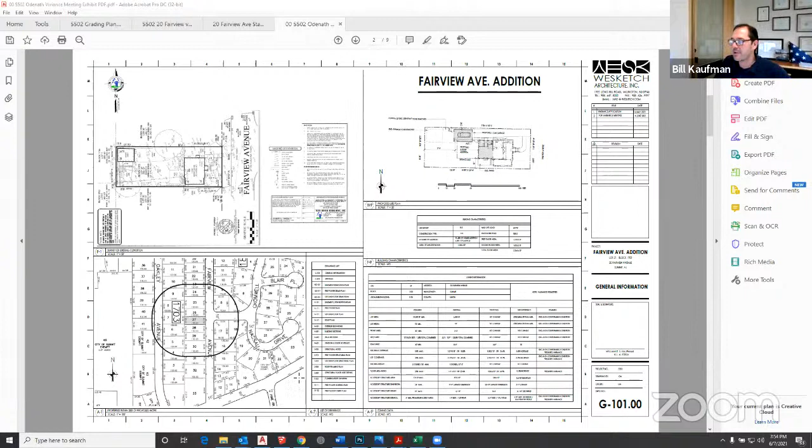But if we refer to drawing H9, which is the upper right-hand corner of G101, that's the site plan. I don't know if the board can see that, or do I need to zoom in on that? Would it be helpful if I zoomed in? I'm just going to be referencing it with the cursor. If you could zoom in, that'd be helpful. I'll take the bullet on that one. Even I'm squinting. I'm just going to zoom in. It's a little bit more difficult as we're going live here to toggle.

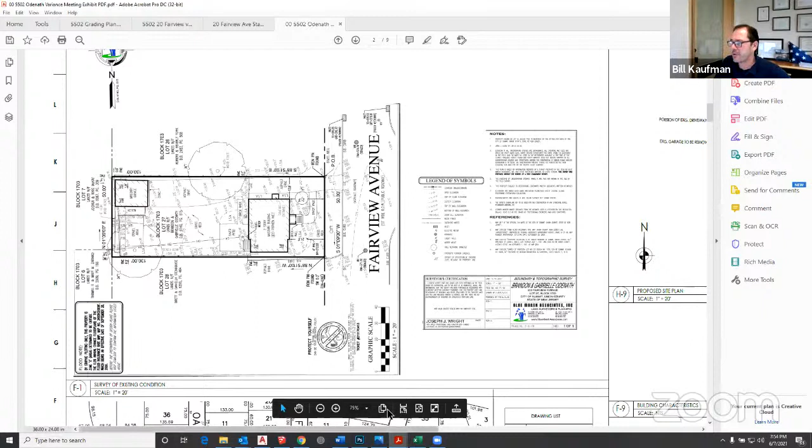I should point out that the information that we derived the site plan from, that's in front of the board, was taken from a current survey that we had prepared by Blue Marsh Associates. I'm going to have to squint and find the date on that for the record, but it is May 11th, 2021. So the survey is current. This is drawing F1 on my sheet G101, and this has the depiction of the lot.

The darker outline around the perimeter is the lot. The next line weight with the box in the front is the existing residence, a two-story brick building. The garage that was in question is in the northwest corner of the lot, to the rear. The home is flanked by an asphalt driveway that runs along the entire length of the northern line, pretty much right up against the property line, and then it pulls off about 1.5 feet as we get close to the garage.

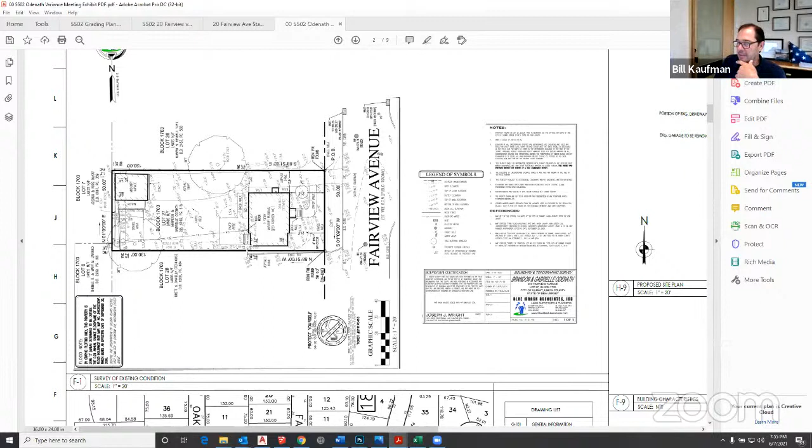And the patio that Mr. Odenath had referenced is directly behind the residence, on the southwest corner of the residence.

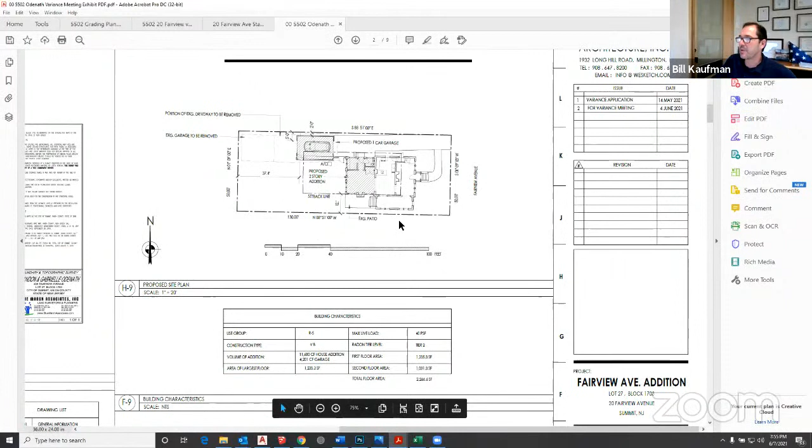We slide on over to H9, which is the proposed site plan. This gives a better indication of what the plan is. The lighter lines in the front are simply the surveyed house, but with the context of interior spaces. So you can see there's a living room and a side porch to the south, and in the back to the west is the kitchen and the small eating area.

The proposal is a two-story addition directly to the west of the building. You may be able to catch these dotted lines that represent the setback lines around the perimeter of the lot. The setback lines are indicated here, so you can see that the hashed marks for the addition fall within the building setback on the north and south property sides, as well as the western rear lot.

The former garage that we're proposing to move is represented by these hash lines in the upper left-hand corner of the property, the northwest corner. We're proposing to move that forward for a number of reasons, mostly practical, in terms of accessing the property from the garage and its functionality. Its distance from the two structures makes it a little awkward if it's all the way in the back, and also it creates a little more yard space.

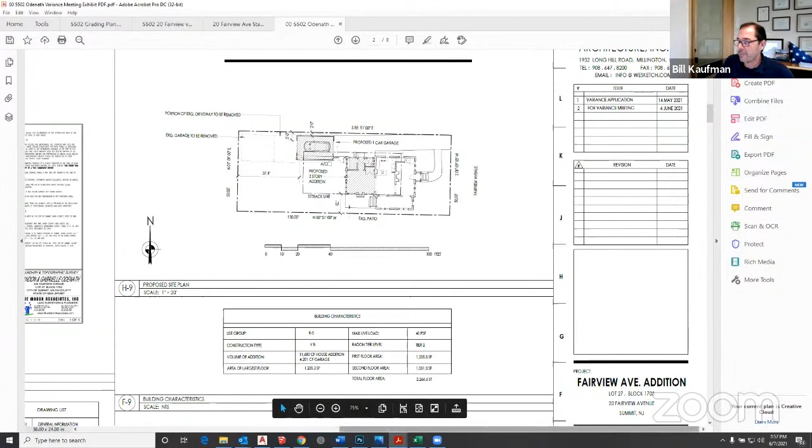The most notable thing that might be obvious is that this lot is substantially undersized from the DRO regulations. This is a 50 by 130 foot lot, and it's about 3,500 square feet smaller than the minimum that the ordinance provides. So while the house may be modest in its scale, it's on a lot that's substantially smaller than others in that R10 zone.

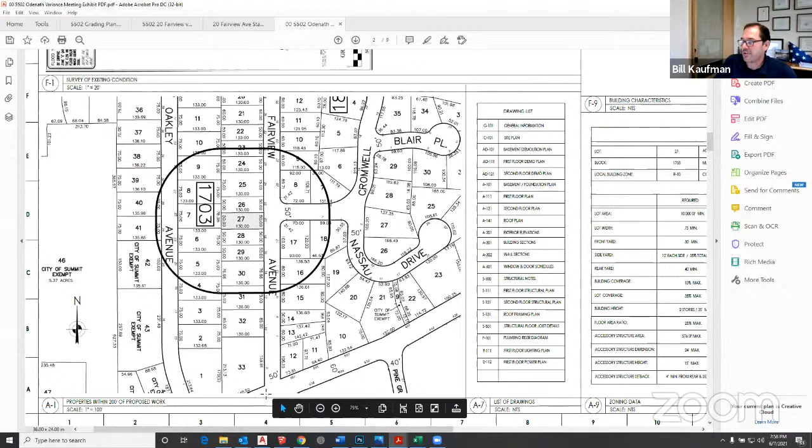I think I have another drawing I can refer the board to. There are a few lots around lot 27 - I'm referring to A1 of the same G101 exhibit. You can see there are a number of those, maybe 4 lots in a row, that were cut down to 50 by 130, whereas many of the other lots are much larger. Lot 25 to the north is of the standard scale. More along Oakley, the lots immediately to the rear are a little bigger, and immediately to the south on Fairview, there's a series of lots that are 85 by 130. So when they created the DRO, presumably it was just an average lot size in this area of what existed, but this particular subject property falls within one of those that are substantially smaller.

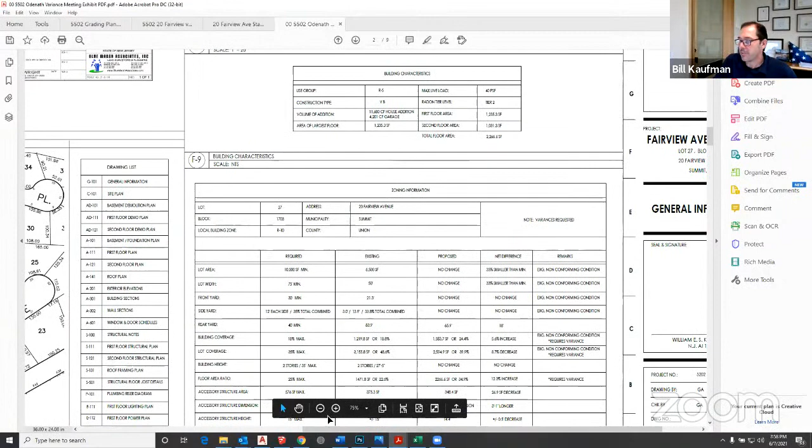So I'm going to zoom back out now, and then we'll get to some discussion points on the architecture itself.

Let me roll quickly through the drawings, and then we can go back to the slight changes we made in case there's any confusion.

A111 of my exhibits is a plan - let's go to A111. A111 is the first floor level addition. You can see there's a family room to the south side of the addition, and on the northern side, there's a small entry foyer, a powder room, and a mudroom space. The detached garage is slid forward and separated by a fence with a gate to the rear yard.

If we slide the next drawing down to A121, you can see the second floor. Chris had requested to see what's on the second floor, so this is really just a copy of the first floor - an exact stack of the two spaces. Now the master bedroom is on the northern side with a bathroom and some closet space. The access to that space is through a very small bedroom that used to be located at the top of the staircase.

As we view the house on exhibit A201, viewed from the north side looking south, as if you were standing in the driveway, the existing structure is hatched all in brick to the left of that G1 drawing, and the new addition is pushed out to the back.

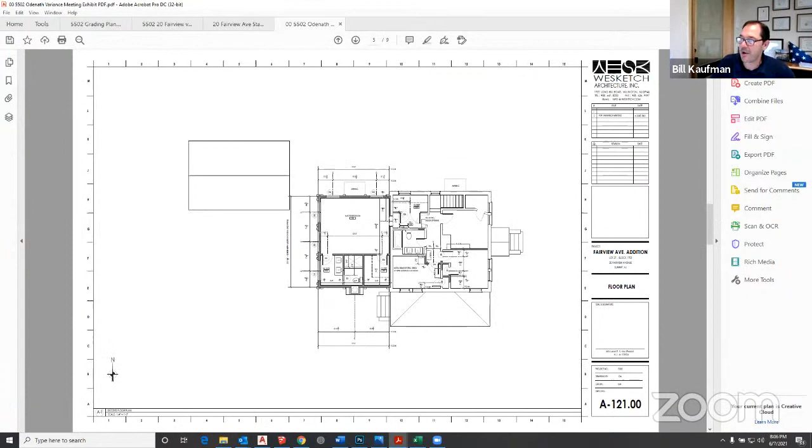Second floor, there was just, I already went over that. There's no alteration because that document didn't exist.

A201, this exhibit also has slight modification. As I click through here back and forth, you can see the staircase, the little stoop from the rear, from the side mudroom entrance, kind of flicks on and off. That turns sideways, and then the garage in drawing G1 pushes slightly to the west. And on the lower drawing, A1, you can see how the garage kind of sneaks in, tucks in a little bit further behind the house.

There's another code issue that Krista pointed out, and that is that the fire code, the building code, doesn't allow openings of any kind in any structure to be within 5 feet of a property line. So by pushing the garage to 2 feet and changing the door to an 8-foot door, we can meet the 5-foot standard. That was another thing Krista pointed out. The last drawing is really just the same thing on G1 of A202, where you can see it sort of pushes the building just back.

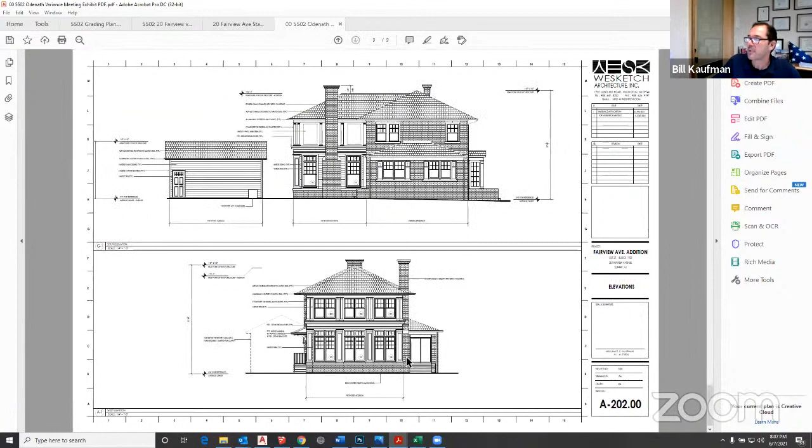Back to my site plan, I neglected to point out another request. There was not originally an air conditioning condensing unit location proposed on our plan. And in the new plan...

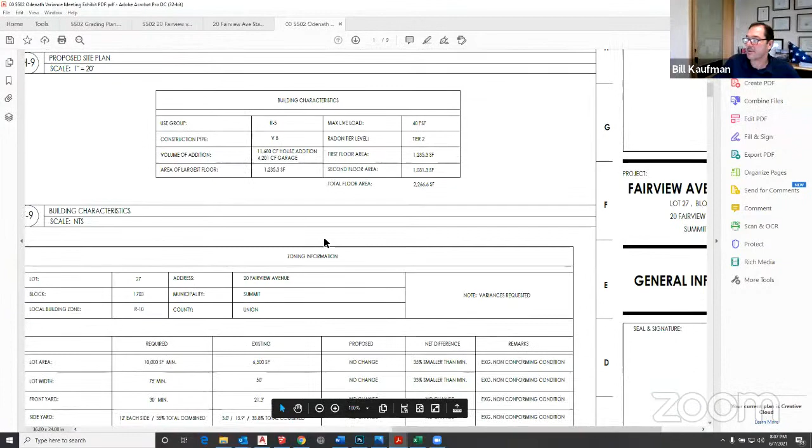Now I have to scroll down here, bear with me. I don't know if everyone can see this. In the new plan, we've located the air conditioning condensing unit along the southern face of the proposed garage. It would be permitted to go along the driveway on the northern side of the house in terms of its distance, but I think it creates a little bit of an impracticality over there in terms of the pavement coming right up to the house and cars being parked there. We prefer not to put it on the patio that exists on the southern side. So this seems to be the best location in terms of its access to neighbors, because no one can see it except for the Odenaths, and we can screen it with landscaping from them. I hope everyone can see that little AC marked square that's in there as well.

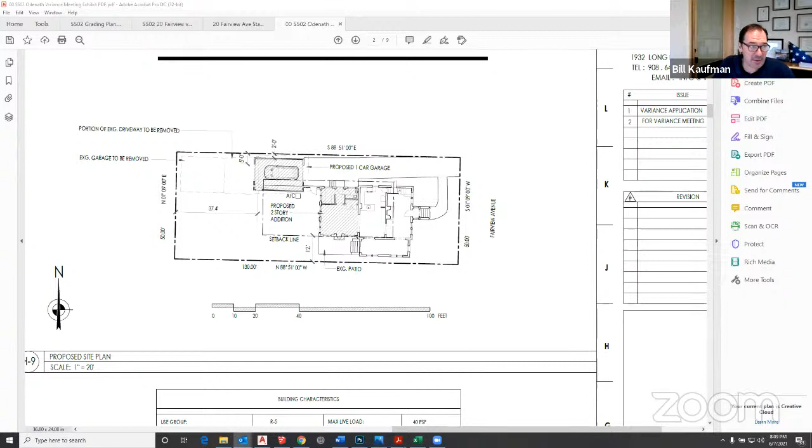I think that's all of my exhibits. Before I get into the variance relief, are there any questions from the board or from the professionals on the exhibits or on the proposed structure?

Questions at this time? Well, there'll be another opportunity after Mr. Kaufman has reviewed the variances.

Okay, press on, Mr. Kaufman. Quiet group tonight.

Great, okay, so a couple of things. We are requesting a C1 variance for the expansion of the non-conforming building coverage condition.

The application that I put before you has demonstrated the hardship with respect to this variance. The lot is clearly undersized for the zone, and there are structures on the property by which their very existence actually creates a hardship. An expansion in any direction results in an automatic expansion of the non-conforming condition. There really is no detriment to the public good, as the proposed additions fall within the required bulk setbacks for the zone. In terms of the height, the side yard and rear yard setbacks, there really is no violation. So in essence, it takes on the same feel with respect to the property lines and consistency, and it's consistent with all the other zoning standards, that the general public really cannot perceive that it's in violation of any of these coverage standards, short of looking at a map and recognizing that there'd be an area violation. So we think that we meet the criteria for C1 on the building coverage condition there.

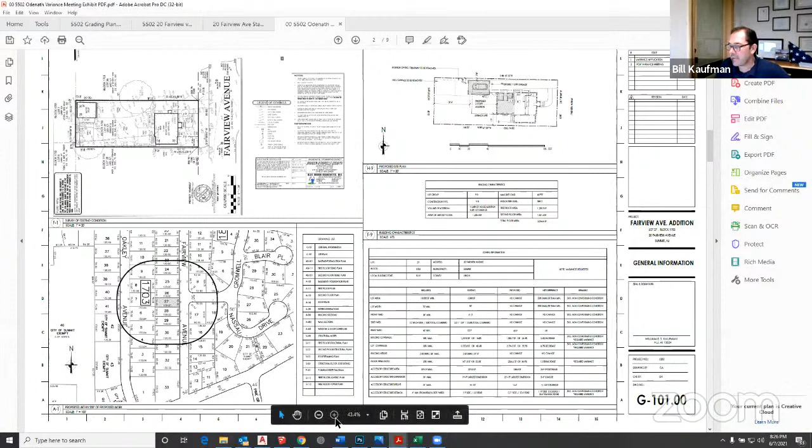As part of our application, I'm going back to the site plan G101 and scrolling to drawing H9. The only patio we're currently proposing is the existing patio, whatever remains of it, which fills in the courtyard gap on the southwest side of the house. Our addition falls within the setback. The existing patio will have part of it under the building removed, and we'll put back the rest against the side of the building once excavation is finished.

That's the only patio that we're currently proposing. We did discuss the potential of doing a small patio in the back. Brandon, you thought for now you want to maximize the lawn space, and you'd put some Adirondack chairs out there so the kids have room to play.

And this was enough to put a little table out and maybe a barbecue, which is what you have out there now anyway. The board's asking, if we're going to be doing something like that in the future, should we include 150 square feet or so of additional coverage within the variance, to be located in that area? I think there's two questions, Mr. Kaufman.

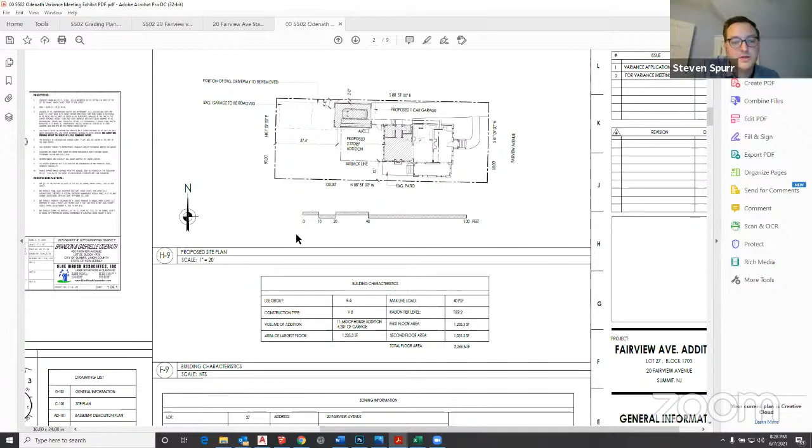So the existing patio has been called out as something that exists without known variance. It sounds like we foresee it existing essentially in its existing form, and that would be considered as an additional variance for approval this evening. That's the first question.

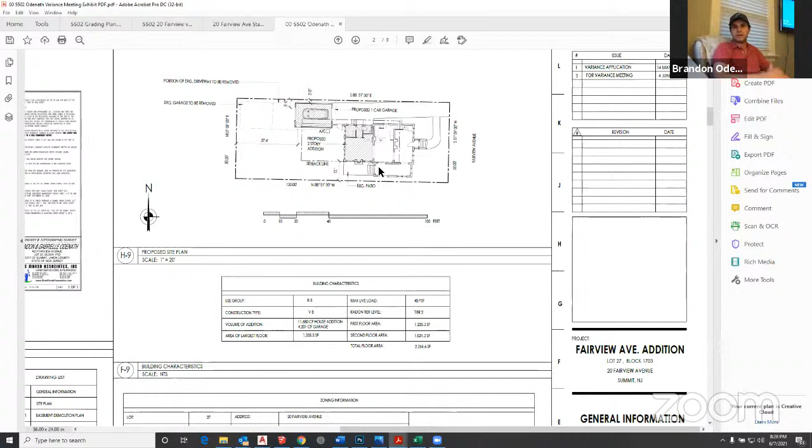Brandon, do you want to leave the patio pretty much as it is and where it is? Yeah, we have the steps that we use to enter the backyard, and would use to enter the backyard if this all gets approved, leading out there. So I think having a patio there is practical, so you're not stepping in the mud. I think we would ideally like to have it continue to be there.

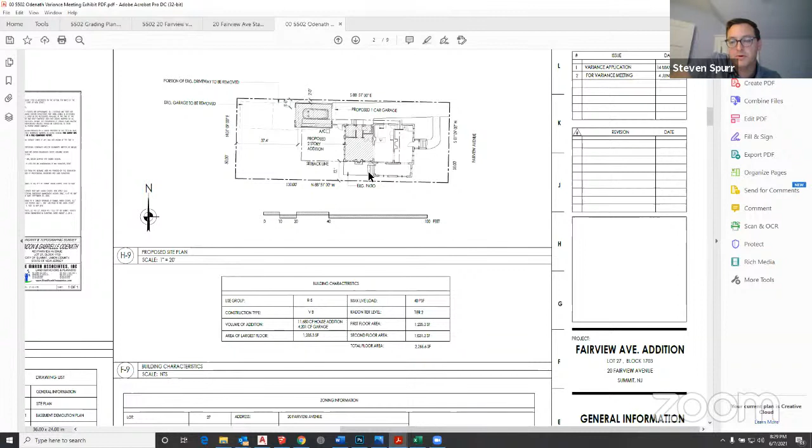Mr. Kaufman, I think I heard in your comment that through the construction process there may be some disruption to the patio, some repair may be necessary, but there's no plans to expand upon that particular patio. That's correct. And then Brandon, I heard from you earlier that you don't have plans to add any additional patio at this time off the back of the new addition.

Is that right? We don't. I will say, we have a six-chair kind of round outdoor patio table that's on our current patio.

So the 150 square feet or whatever that is, if anything that we were going to ask for, it would be to basically have a place to put that table. And it would probably be directly to the rear of the proposed addition.

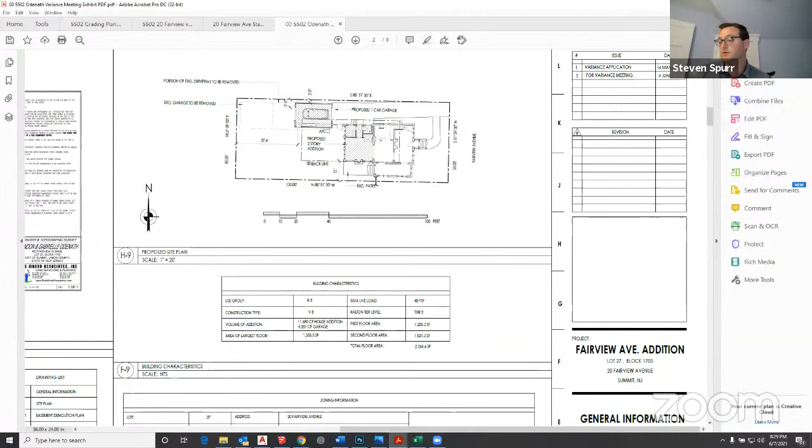Mr. Kaufman, can you give us a sense of, just so we're 100% covered on this, what's the impact on lot coverage if we were to include, say, another 160 square feet? Yeah, let's go to my chart here.

Board, bear with me here. I'm only entertaining this because Chris is getting another crack at these plans, so we might as well give her something to work with. 35.

So 160 additional square feet in a to-be-determined format would put us to 37.5%. Why does that not look right to me? Something went wrong, sorry, went the other way. 25.94, I subtracted it, 4.

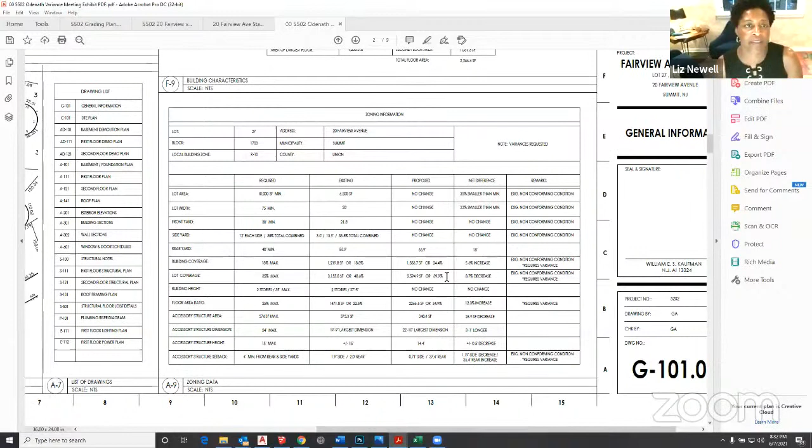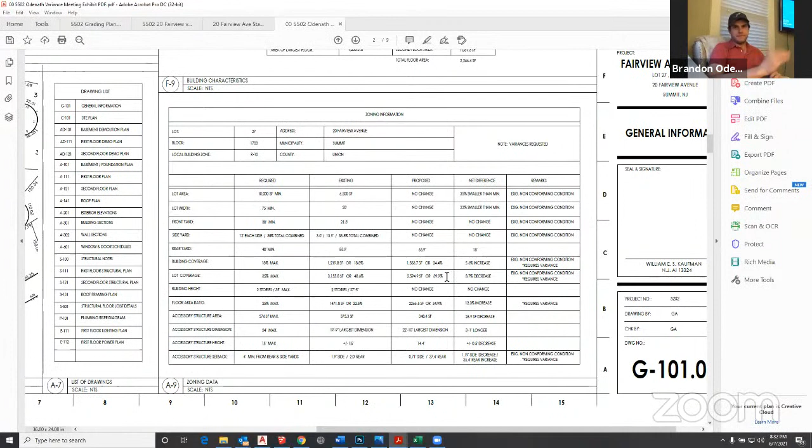And I'm not forcing you to spend more money, Brandon, but is this something that sounds like you might be interested in entertaining? Yeah, I suppose, thank you for bringing that up. All right, don't send the bill to my house, please. All right, so we'll proceed.

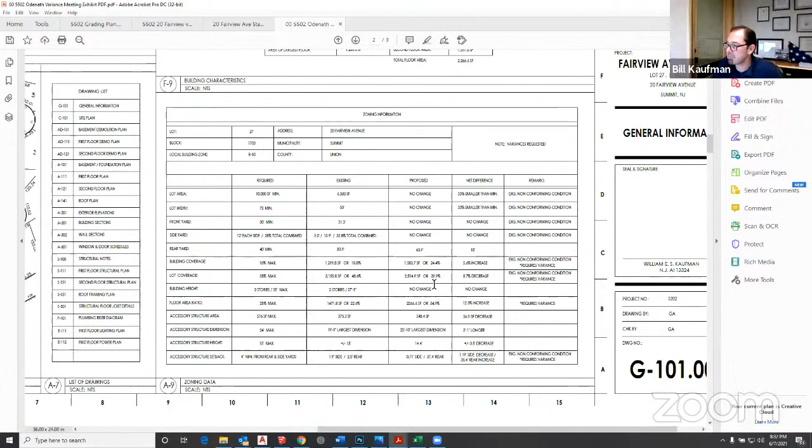We'll proceed then with those adjustments. Andy, you're kind of following along here. So 160 square feet, the plans would be adjusted to reflect that additional coverage in the rear. Yes, and the final number, if I heard it correctly, requested for lot coverage would then be 42.3%. Is that right? Correct. Okay, all right, that was good.

Any other questions from members of the board? Oh, another quick question. Yep, please. Did you consider a tandem garage?

A 2-car kind of garage? Is that what you're asking? Tandem, yeah, front and back, she means. Oh, front and back.

Well, actually, I think that's on that plan. We had at least talked about having a garage door in the back of the garage to get a lawnmower through, or any other vehicle we need to get to the backyard. Frankly, I think a 2-car garage - our current one is like a 1.5 car garage size, and it takes up half the width of the yard. So I feel like a 2-car garage is just bigger than what the lot can handle, just from living here. That's my experience. So I had not seriously considered putting a larger structure than a 1-car garage back there.

I have a question for you. Yep, please. Are you putting a car in your garage, or do you plan to, or are you just going to use it for storage?

Yeah, that's a good question. Right now it's purely storage, and only things you don't mind mice and other larger rodents getting into, which is a lot of the purpose for why we're pressing to do this. I think if it's closer to the house, it probably would be used at least in bad weather situations. With a narrower door and whatnot, I don't know that it's going to be used every day for getting kids in and out of the car, but it would be used more than it is now for an actual car.

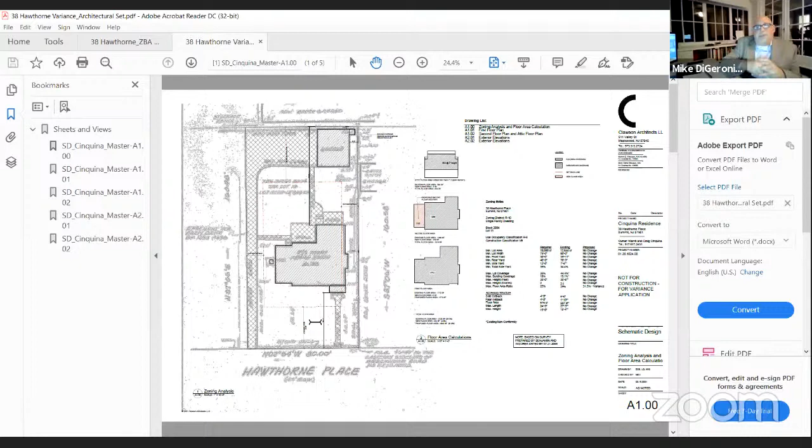The neighborhood has a number of houses of a similar size. The lots are consistent for the most part. On this side of the street, they're slightly smaller than the ones across the street, but generally speaking, they're all of a substantially similar character, and the massing and scale of them are very similar as you go up and down Hawthorne Place.

One of the things we're going to talk about in the concept is the idea of the addition, creating a secondary mass to the main mass of the house. One of the things we wanted to point out was that this kind of concept and configuration is fairly common on Hawthorne Place and in the neighborhood. You'll see a number of homes that have a main mass and then a slightly set back secondary mass that, in terms of its height and footprint, is secondary to the overall configuration of the home.

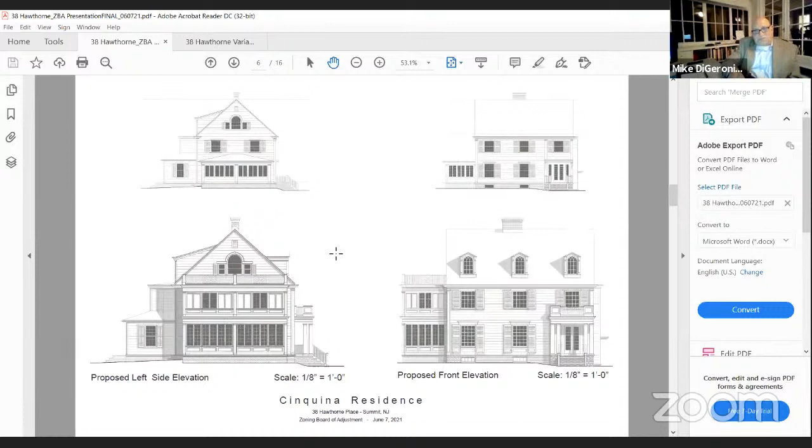As far as the variance requirements and what we're seeking relief on, because it's an increase in floor area, it is a D variance for the floor area.

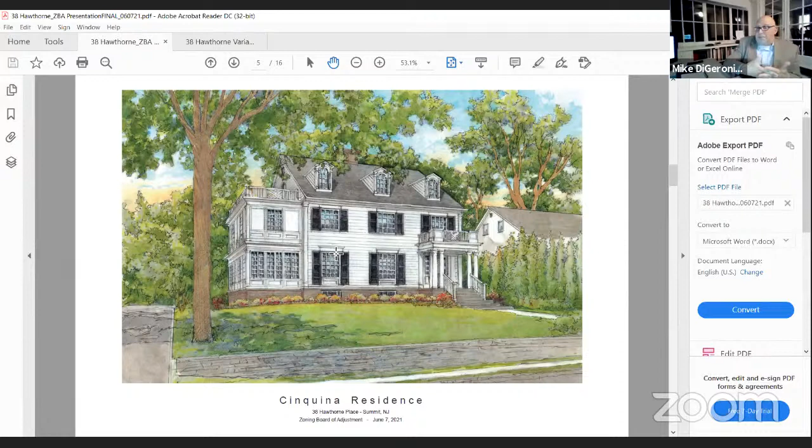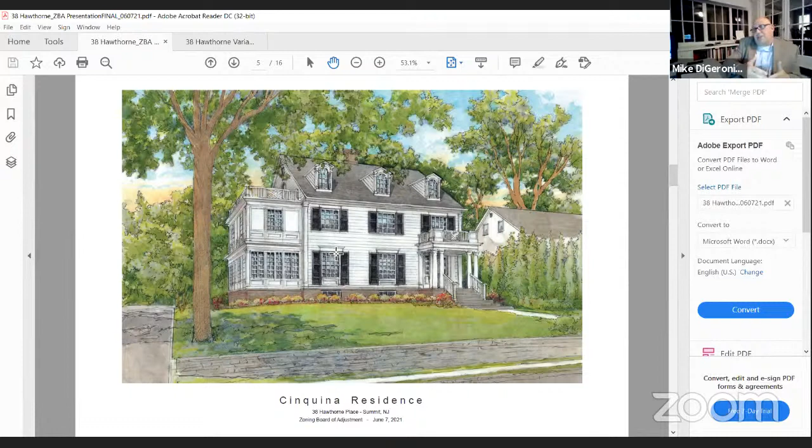Part of the design intent is really to be sensitive to the footprint of the property itself. We wanted to make sure that any improvements we made were completely within the footprint of the existing, so it didn't exacerbate any of the conditions, whether it's setbacks, coverages, or building heights. Everything you see here hasn't increased or changed any of those conditions, and it's purely that square footage for the addition that requires relief.

While the dormers and the portico don't technically need any variance relief, we think they very much contribute positively to the design and to the streetscape, and are consistent with the historic character of the home and the neighborhood, and are a big part of the overall aesthetic.

The design of the 2-story addition was really looked at to be in scale and in keeping with the other homes. So we don't feel that it's detrimentally impacting the neighborhood, because it's really something that's akin to what exists in many of the homes already there.

The property has substantial landscaping around its perimeter currently, and that will remain, and we think that helps further screen any potential impact. As a modest increase in floor area, we think the lot and the property can accommodate that increase, which is the threshold for the D variance for the floor area case. So with that, I'm happy to answer any questions or go through anything in more detail.

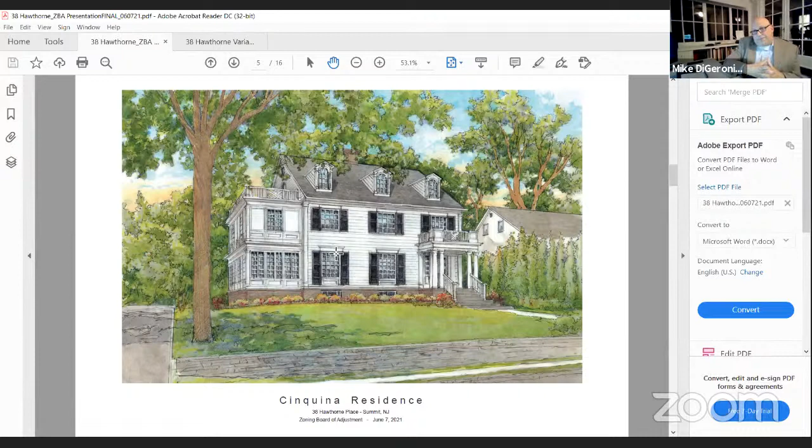Okay, thank you very much. I don't know, Mr. Dower, if there's anything at all for you to really comment on here. Nothing at this time, Mr. Chairman. Okay.

Any questions from members of the board? Come on, this isn't anywhere near as late as I thought this evening would go, so you guys have the energy. No, it's relatively straightforward. Mr. Millay, did you have a question or a comment? No. Okay.

Fair enough. Any questions from members of the public? I see a couple extra folks on here. If you are here from the public, you're welcome to ask a question to the architect at this time. No. Okay. We would normally also offer the public the opportunity to comment on an application, pro or con. I don't see anyone raising their hand or unmuting themselves. Okay. And I believe Mr. DiGeronimo, you are the only expert witness this evening for the application? Yeah. Okay.

Applicants, anything you'd like to say in closing? This actually ended up being a pretty straightforward testimony, and the board doesn't seem to have any questions or comments at this point. Yeah, so given that, I don't know that we want to add anything else to the discussion. Okay, fair enough. Safe bet.